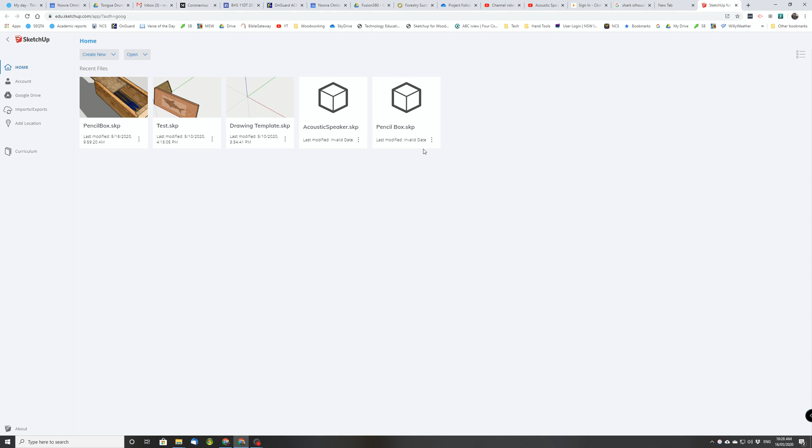Alright, back to the SketchUp for Schools tab. Looks like it's just opened. You should have in the past created a drawing template, so let's open that.

The first thing I'll ask you to do is a save as and name it tongue drum or something similar. Click OK. It's probably going to ask you whereabouts on Google Drive to save.

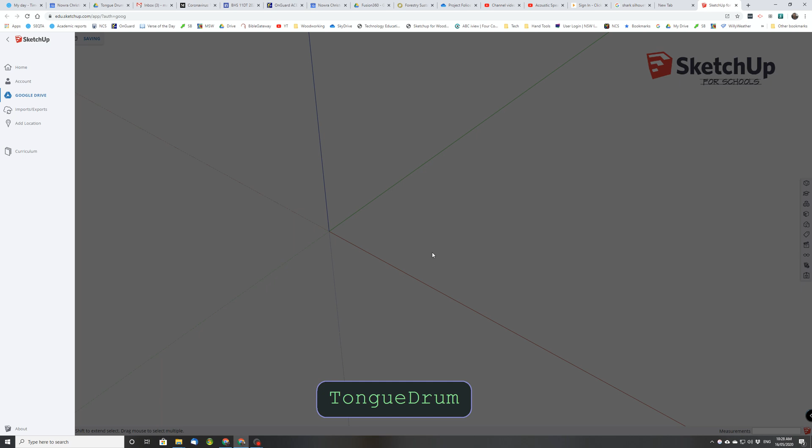Yes, it will. So navigate to your folder, your woodwork folder, where you save your CAD drawings. Mine's in a different place to yours, so I'm going to put mine in this tongue drum folder. Now, don't double click to open the folder because it'll blank out the select. You've actually got to go back a step and simply click once on the folder that you want.

Then click select. That's a bit of a weird way this save box works. So don't open the folder, just select the folder you want to save it into. Click select, it's doing its thing. There you go, it's saving. It's now named as tongue drum.

So let's start off by drawing that end piece. It's a rectangle, so we're going to look for the rectangle tool, and there it is. Now we want to draw a vertical rectangle, and in SketchUp, remember you click once, and then we type our sizes. Our dimensions down here change. But before you type any sizes, we need to get this - at the moment that's laying flat.

We need this on one of the vertical planes. So I think if I hit the left arrow, which is the green axis - there we go, that's what we want. The box needs to be green.

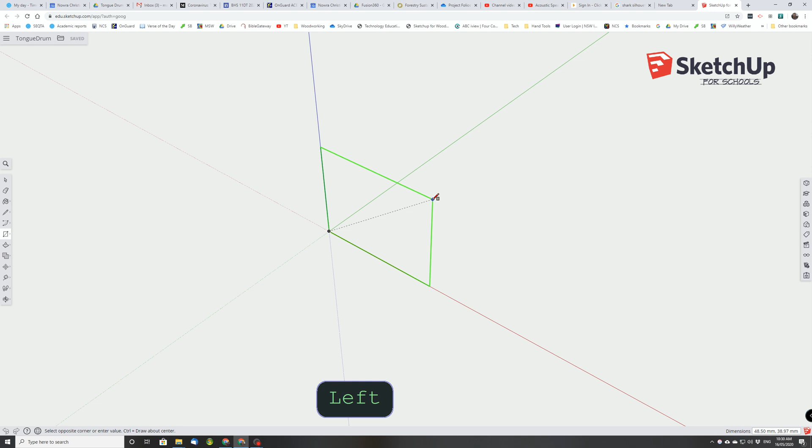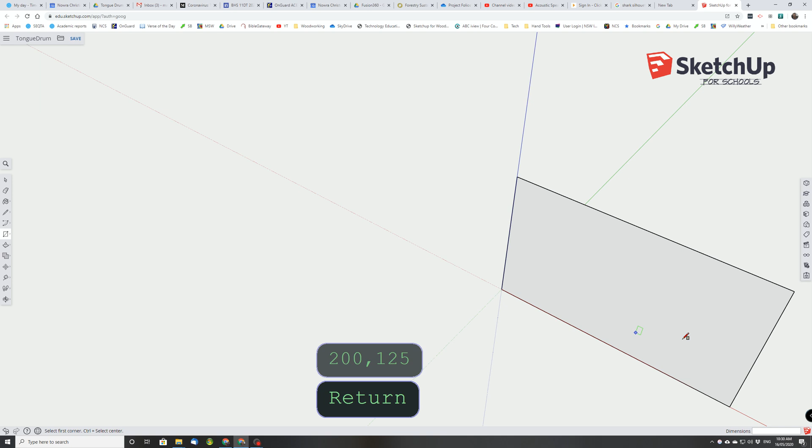Have a look at which size, the small size first, so it's going to be 200, 125. And that's very big, so let's zoom it back so we can see it. Hold down Shift and the middle mouse button to drag it across.

Alright, we need to draw in next. We need to draw in our lines that give us the angles. I just need to flip back to my drawing. It's 135 across the top, so we need to do a little bit of maths.

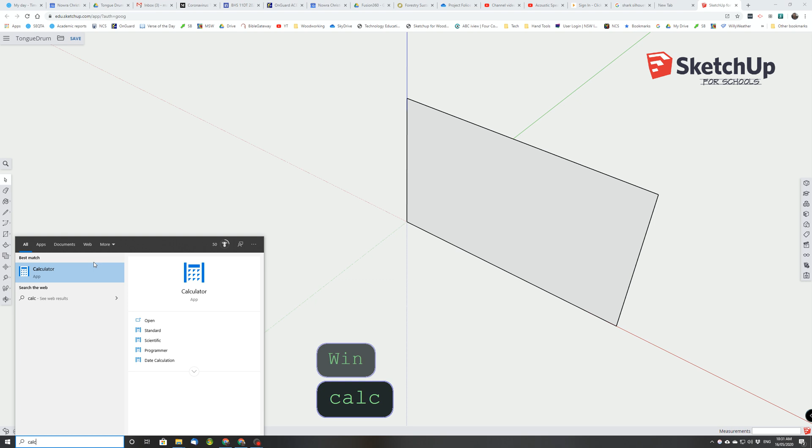I'm going to bring out the calculator - there it is, the calculator app. You need to go 200 minus 135, press equals, and we're going to divide that by 2. That's 32.5, we're going to remember that. Click back to SketchUp - 32.5.

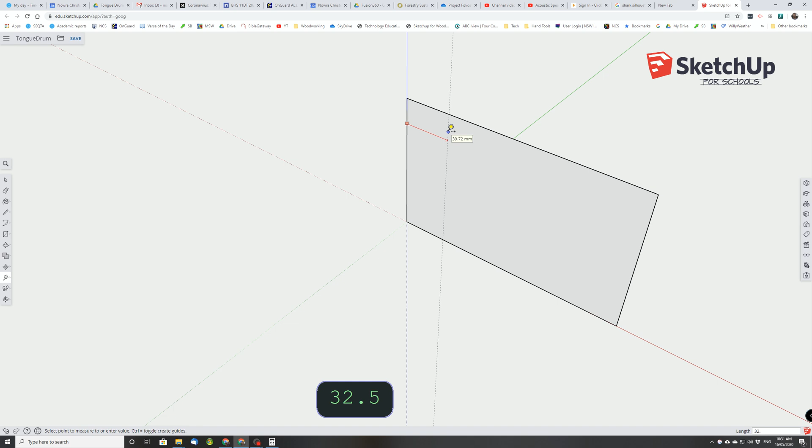We're going to use the tape measure tool now. There it is, tape measure tool, simply click on the edge. Make sure it says on edge before you click, and you get the little red box. Click once, let's move the cursor across and we'll type 32.5, press enter. We're going to do the same from this side, on the edge, 32.5, enter.

Now we want the line tool - there it is, line tool. The line starts in the bottom corner, so click once and then find the intersection. Make sure you get the little red X on the intersection, that's important, and the tooltip should say intersection. Make sure you find that before you click. Let's do the same on this side.

Click, intersection, click. We're going to use the eraser now to get rid of some of these extra lines. So we don't need that line or that line, and we don't need this dotted line anymore. Let's get rid of those.

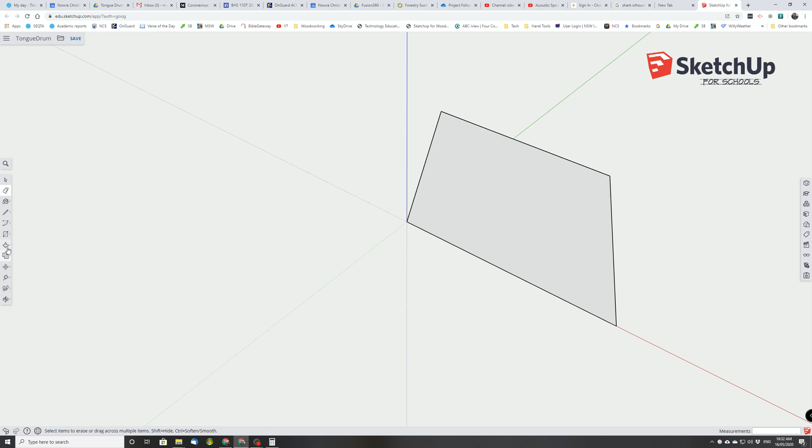There's our shape. Push-pull tool is next - we need to give our shape some depth. There's the push-pull tool, click once on the surface, let's move it this way. Don't click again, but simply type 12 - it's 12 millimeters thick. Press enter. We've set our thickness there.

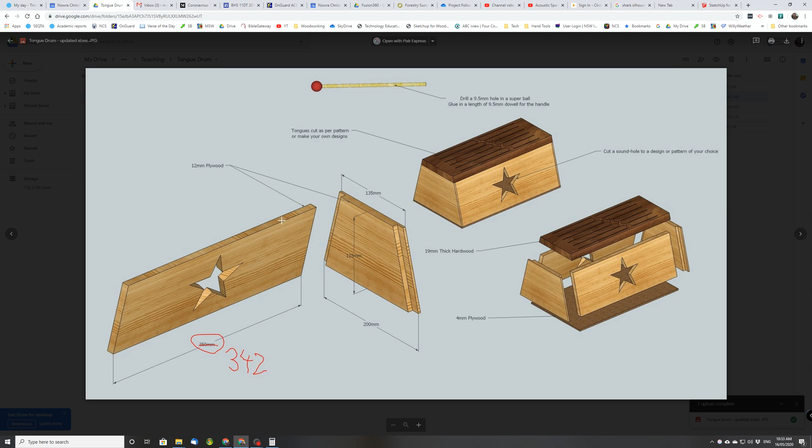We're going to go back to the tape measure tool. We've got some rebates to cut out of here. These rebates need to cut out of here. It doesn't say it on here, but those rebates are 8 millimeters deep. So let's go back to Sketchup for Schools - not Sketchup for tools.

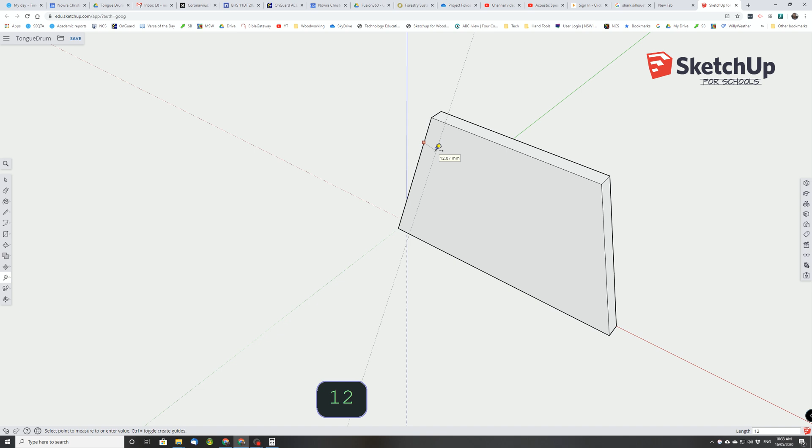Alright, tape measure tool. Again, we're going to start on this edge, make sure we're on the edge. Click once, let's move the cursor across, 12 millimeters across. So I type 12, press enter. Let's do the same on this side.

Yeah, that looks right. 12, press enter. That's set that in the correct place.

We're going to go back to our line tool and do a solid line from intersection to intersection. We need to draw these lines because it will determine where that rebate joint will go. So I've gone back to the eraser tool. Let's get rid of those now, we don't need those anymore.

Push-pull tool. Oh yes, there it is. Now this little rebate, we're going to move not this way, we're going to move in this way. So just move it in the direction you want to go. Let go of the mouse, then type 8, enter.

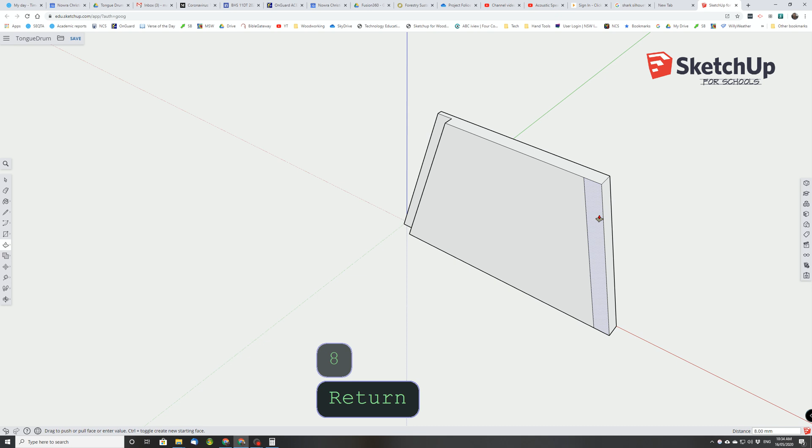This side, we can do exactly the same thing. I'll show you this other neat trick. If I click that, then put my cursor on that face, make sure it says on face, or even on edge is okay, and click, that will set this rebate at exactly the same size.

If I press the space button, it does the same as going back to the select tool. So we are going to select all of this. There's two ways we can do that. I can drag a box around everything, that selects everything, or sometimes it's better, sometimes you can't drag a box because it'll select other items.

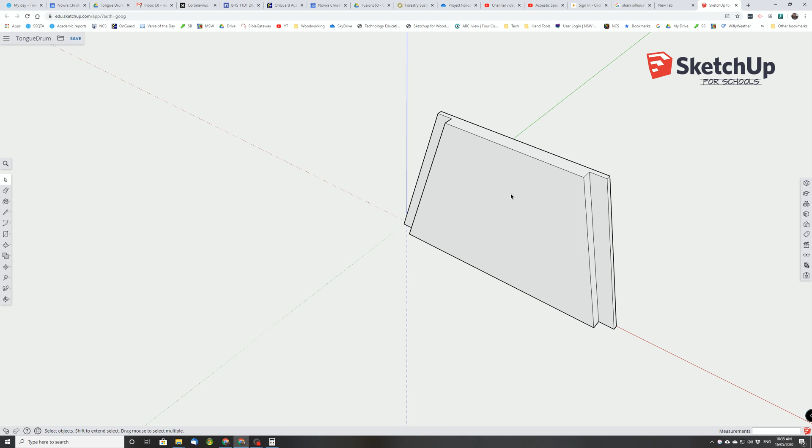Sometimes it's better to do a triple click. So it's 1, 2, 3, and it selects everything. If you click too slowly, just click out and try again. Oh, I only double clicked that time, that's only 2 clicks.

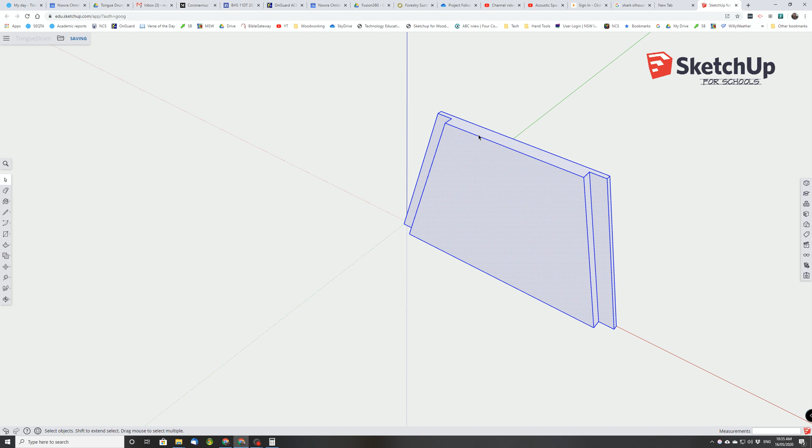So everything's selected and we've got a blue outline around everything. That's important. If I only did a double click, it's only blue outlining on the surface. That's a mistake. Make sure the whole thing is selected.

Right click and go make component. This is one of our ends, so we're just going to type end. Press enter. I know that's a component now because it puts that bounding box around it.

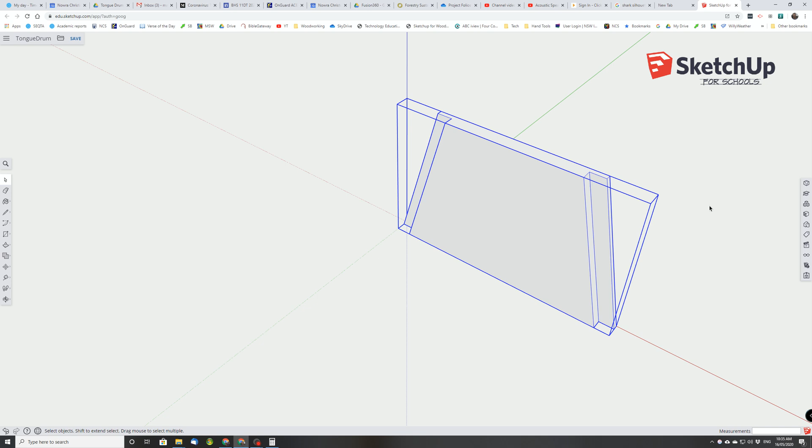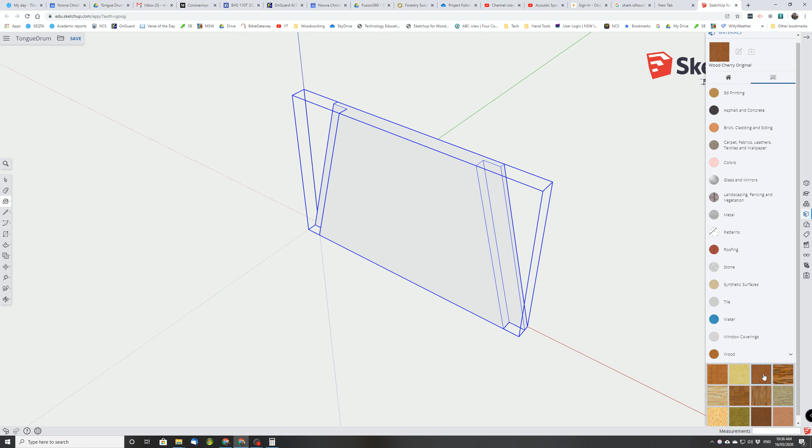Alright, let's set a material to this. So over in the materials box, click the browse button and look for the wood ones and find one that you like. Click to select it and then click on your component. It'll set that material to that component.

Now the trouble with this is, as you can probably see, that does not look anything like timber. So what I like to do, we need to go back to our home button to do this. And there's the one we just used, so it's down the bottom there. Let's click to select that.

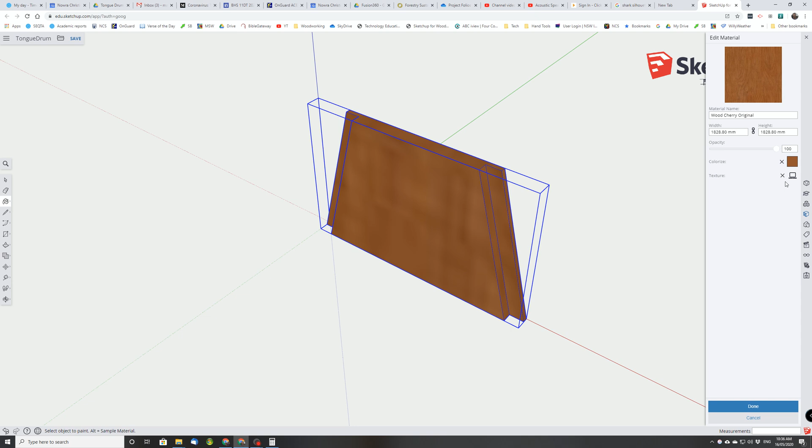Now we get this edit material box option. So let's click that and texture, and we're going to download a texture from the internet. So we'll click that button, and it says choose an image, drag and drop or select from your computer. So I'm going to open a new tab, and let's simply search for timber texture.

I'll open images. Now find one that you like the look of. For me, it seems to work best if you choose one with the grain running horizontally rather than a vertical grain. So simply find a texture that you like the look of and we will download it. I'm going to go light color. Yeah, there it is there.

So I'll right click and save image as. I'm going to save it to my desktop. Just remember the name, it's called iStock Photo. And I will save.

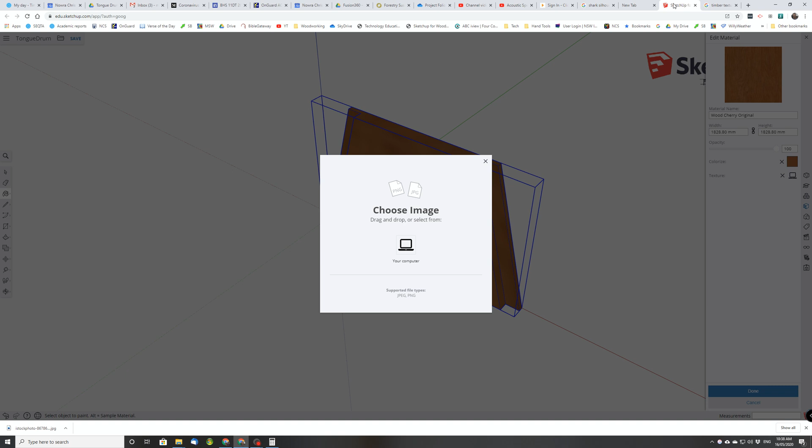I'll go back to SketchUp. I'm just going to restore, press that square button to make my window smaller, or I could drag the edges to do that. There it is there, there's the texture that I just downloaded. I'm going to drag that into that box.

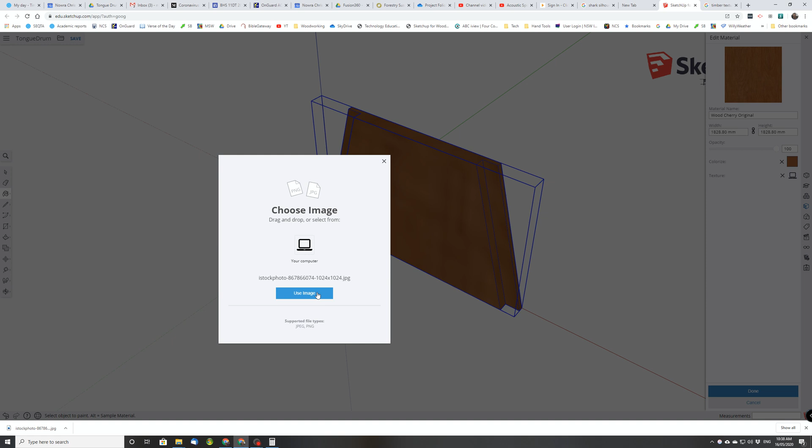I can maximize my screen now, and I'm going to click Use Image. And still doesn't quite look right. So it looks good here, but it doesn't look good here. And the reason is because it's got a width of

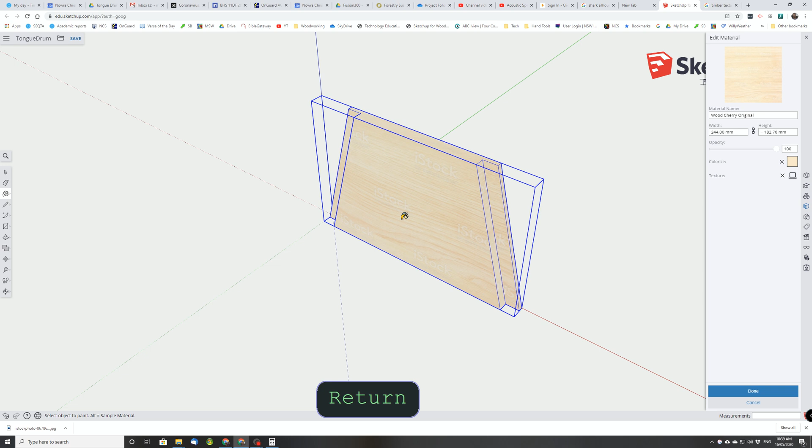1828.80, so I'm going to change that. Let's just delete that. So instead of 2000, it now says 244. I'll press enter, and that looks so much better. I've got the wood grain. It looks like that came up with an iStock icon there.

So that's basically it. We can colorize this, so I can change the color by selecting somewhere on here or dragging and dropping, and it'll keep that wood grain, but it changes the color. Give it a name, give it your own name, ML1 I'll call that, and click done.

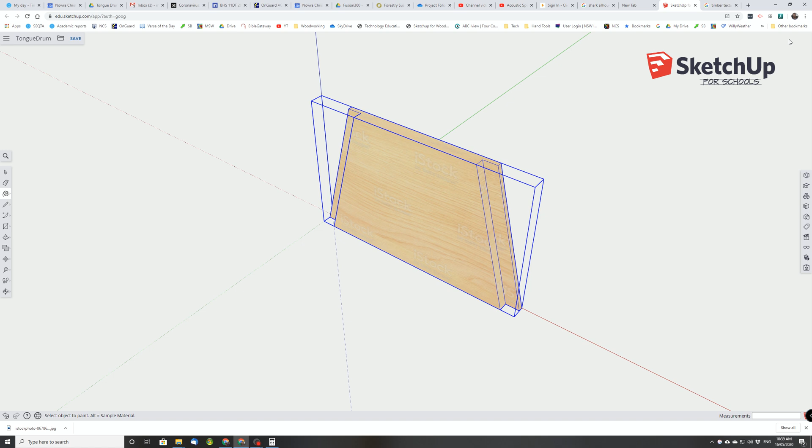Alright, we can close that by clicking the X, and there we go. That's our first part. The next video we will do one of the sides.